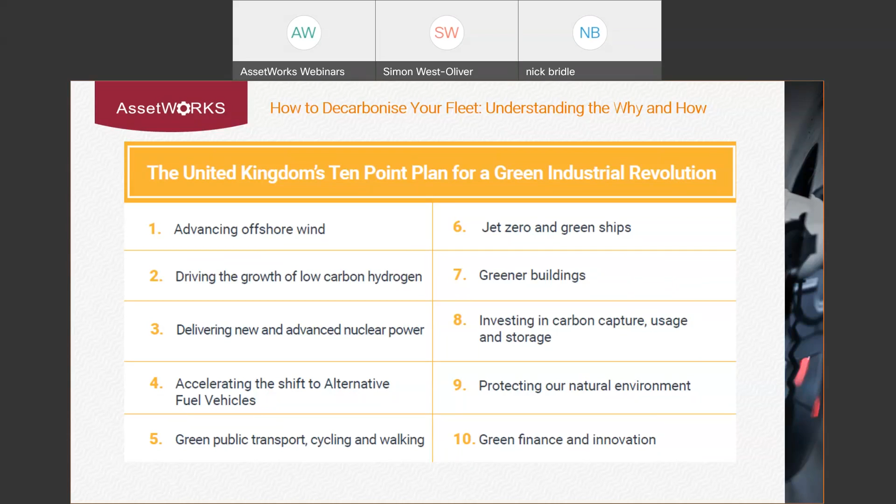The area that we really want to concentrate on is number 4, which is accelerating and shifting to alternative fuel vehicles, and the impact that has on you as a fleet operator going forward. I want to spend a little time looking at this holistically, the impacts that are already happening and the predictive impacts we're starting to see. What started off as a very slow drift is now really gaining some momentum.

Next slide, please, Mariella. So here's a few interesting points, which came out from Telekom Deutschland a while ago. It's a European view, but it's quite interesting. We're expecting to see a peak of cars by '25, and then to start to see a steady decline. Now, this is across the whole of Europe.

What we are actually starting to see is a dramatic increase in the search for vehicles with alternative fueling capabilities, moving away from fossil fuel vehicles, and that is really starting to gain momentum. Partly driven by declining usage post-pandemic, but also really defined by Joe Public, the ordinary operator of the vehicle, starting to get on board with the concept that we have a time limit. But the impact has also started to arrive with the OEMs, because they're realizing that as we move into these different fuel type sources, especially EVs, their after-sales opportunities for spare components are going to start to change, and drop quite dramatically.

We're also starting to see that change in advanced driver assistance systems, this drift towards autonomous driving vehicles. It's the cost of these types of solutions that has inhibited their future development, but that's starting to decrease. It's also the infrastructure starting to change that could support that type of vehicle. And this is really starting to push that change from ownership to usership. So we'll start to see the automotive industry start to embrace different channels to market, and that will have an impact right across how fleets are operated.

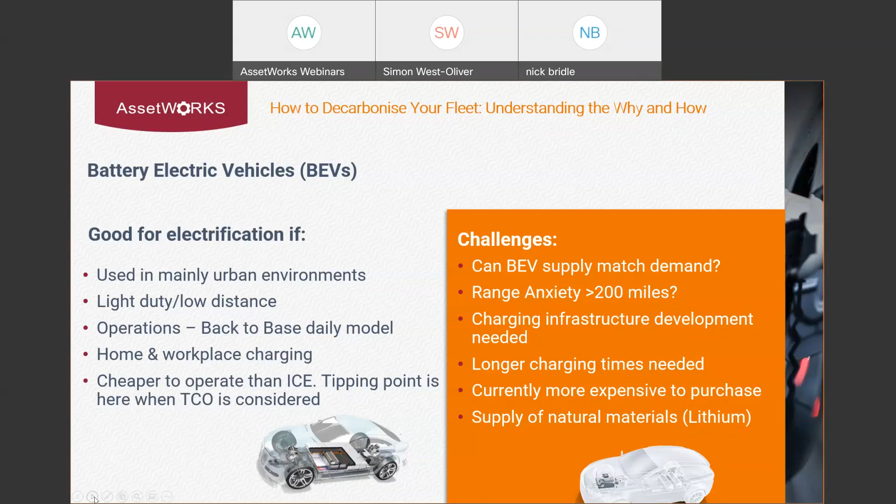So the alternative, fuel cell electric vehicle technology, is starting to appear. It does offer considerably longer range. Battery tech is smaller, more agile, and there is this opportunity for exploiting some of the decarbonisation products around renewable energies, especially things like green hydrogen. It is scalable. We're only just starting to see the appearance of hydrogen cell tech coming down into the LCVs and the car sector, but it will start to arrive, and it will start to arrive with some pace.

For me, I have a biased opinion—I think it's the fuel of the future. But certainly, I think for our commercial vehicle operators, it is the way to look at how you decarbonise some of that HGV operational requirement.

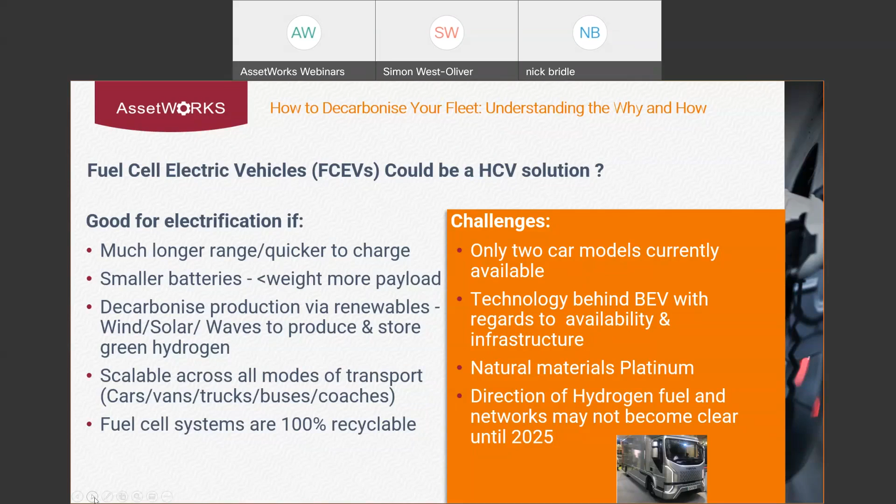That's the end of my presentation. I'll hand over to my colleague Nick. He's going to talk a little bit about how we help organisations decarbonise.

Thank you, Simon, for that informative update. I'm just going to now take you through our CAM capital asset management product and how we can help fleet and asset managers forecast out those decarbonisation plans, etc.

So before investing in EVs, first off, we need to prepare our fleet data or asset data. How clean is that data? Does it currently exist in spreadsheets or silos? And am I able to provide a report and a number of scenarios with recommendations to the board? I'll come on to some of that in a minute.

Can we all answer the following questions with regard to our fleet data? We're looking for a strategic capital forecast out for the next 5 to 10 years based on scenarios. Can I create an OPEX forecast—not only the capital I need to purchase or lease the vehicles, but the OPEX I need to maintain those vehicles by year? We've mentioned clean air zones, and some national fleet operators, or where you travel extensively, need to look at when you purchase new vehicles, maybe not put them into certain sites. You may need to move some of those new cleaner vehicles into these clean air zones so you're not paying the fines, and move some of the not so clean vehicles out elsewhere. It's a consideration. And what is the optimal vehicle replacement time per vehicle by category?

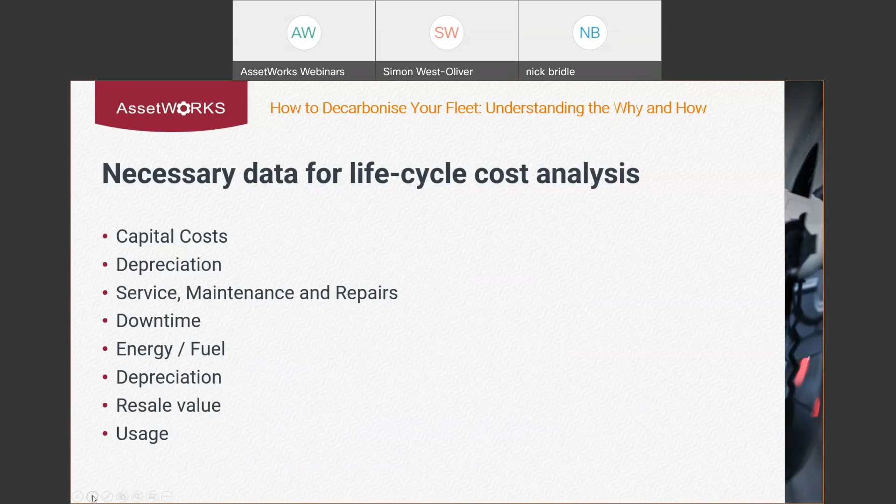So what is CAM? CAM is our capital asset management system, and we're managing full life cycles from plan to disposal. So we can procure vehicles through CAM, we can dispose of vehicles, we can do the analytics, and we can do the planning and the budgeting. And in the center we have a data mart where we will load your fleet details, and we can do that life cycle modeling through that fully integrated product with our maintenance and our fuel systems.

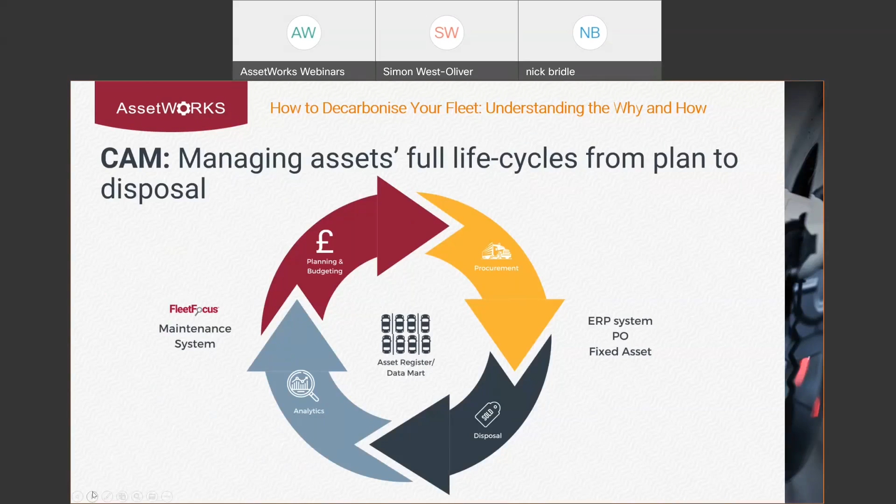So the data mart in CAM from our FleetFocus product, we can bring in maintenance, labour, parts and commercial costs. We can bring in downtime costs, our energy, our uses in our capital, and we can run that information into the CAM system on a regular basis to be able to do the analysis.

So what does CAM do? It manages all types of assets, not just fleet. It can manage plant, it can manage the charging infrastructure now. So if you have a project to replace a certain amount of vehicle types in an operational location, you can also use CAM to procure the charging posts and some of that project information, any type of equipment. So it's not just fleet assets - it's the associated plant, the chargers, laptops, anything else you can procure via CAM.

So Simon mentioned options for decarbonisation. This is a bit of a busy slide, but on the left-hand side, we mentioned range up to around 200 miles. So for your daily operations, a lot of the plant and the small delivery vehicles, some of the RCVs, the refuse collection vehicles the local authority uses, they're all at low mileage on a daily basis. So those options up to 2022 now are viable for the move from ICE to battery electric.

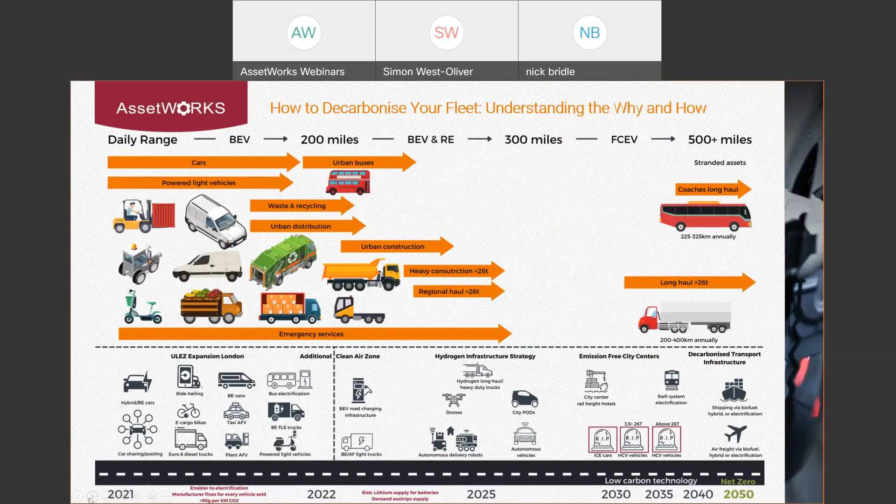So the life cycle model we're going to get into now. And the life cycle model is based on a category. And a category is a type of vehicle, an operational vehicle - it's not a spec, it's not a Ford, a Vauxhall, or a Mercedes. It's more of a light commercial vehicle for deliveries, or it's a heavy commercial vehicle or a 7.5 ton truck. And we look at its operational life cycle to determine when's the best to optimize that.

Now, having said that, at year 5, some of our customers will look at when the operating costs exceed the depreciation, and that's another consideration on that life cycle. So we can run life cycles by categories, and we can look at the data, the depreciation and maintenance, the downtime and the energy, and we can run a MECE model to determine when is the lowest year and what should that life cycle be.

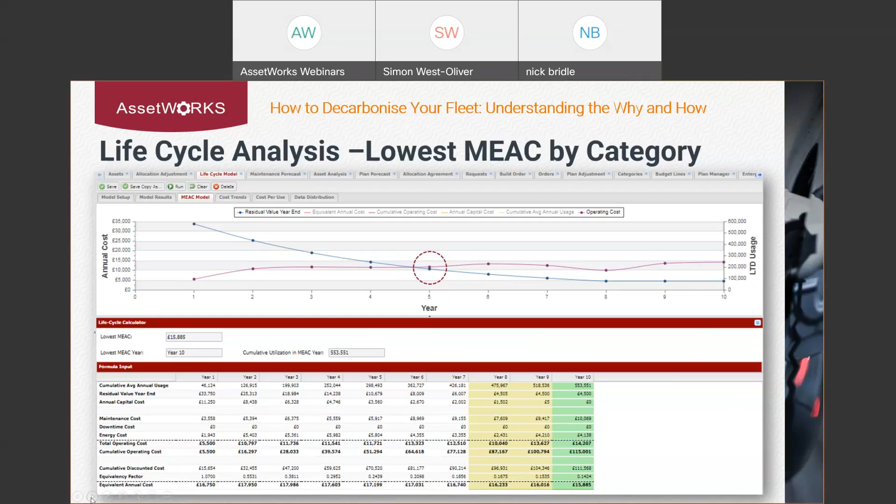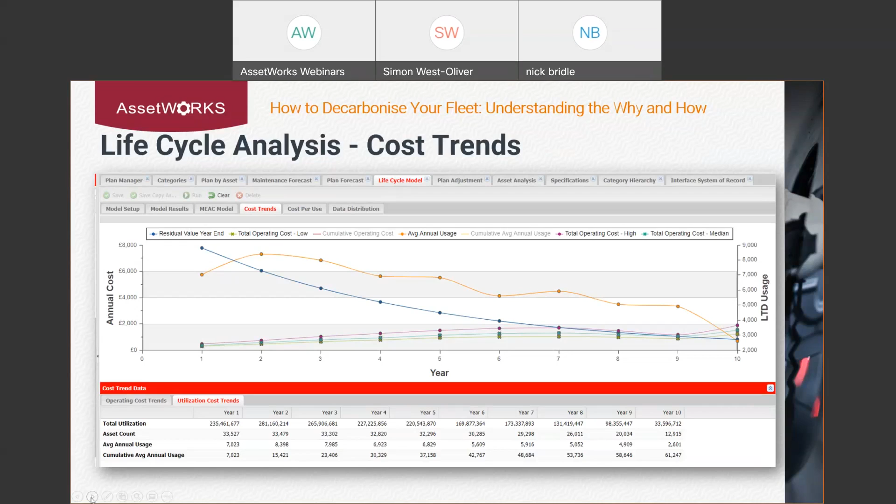Okay, now we get into the operational view. If you remember on the MEAC model, we said year 10 was the lowest operating cost from a finance view. Now I can look at my pence per mile cost by category.

So we can look at the MEAC model from a finance perspective. We can also look at our pence per mile costs, and we can determine that year 10 on a MEAC basis may not be the most efficient.

Maybe year 7, if I look by pence per mile, on those categories. So I can run those scenarios and we can have an informed debate based on data and technology in the system.

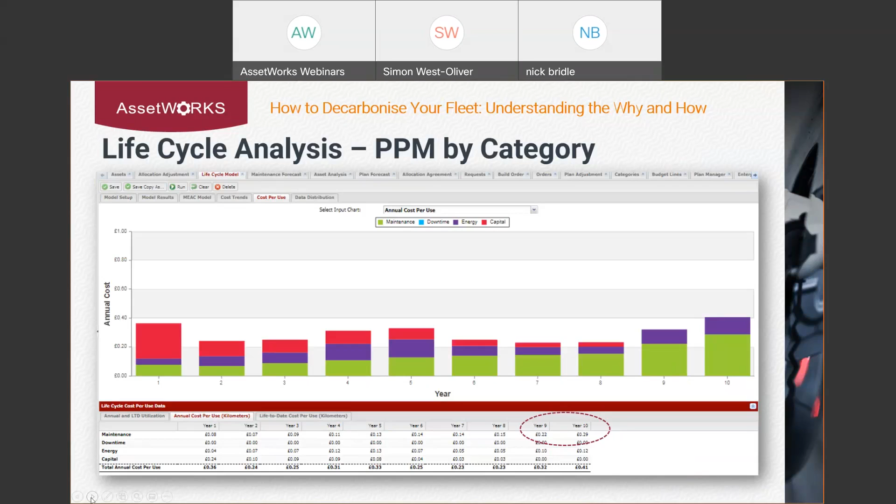From a maintenance perspective, we looked at the capital costs. We have a maintenance forecast and a rate card, and what this rate card does is pick up the costs of this category.

These are car-derived vans in this example, and we can model out the labour, either the SMR costs or the non-fair wear and tear costs, with the labour hours for every vehicle in that category by year — years 1, 2, 3 — and we can identify what the costs are in each of those years.

We can model that out into a workshop budget or a fleet-related budget that supports the capital. So the capital and the depreciation we're going to look at, and now we're looking at the rate card.

We're looking at what the impact is of those operational maintenance costs on this type of category throughout the years. So we're looking at both CapEx and OpEx as we start to forecast out the future.

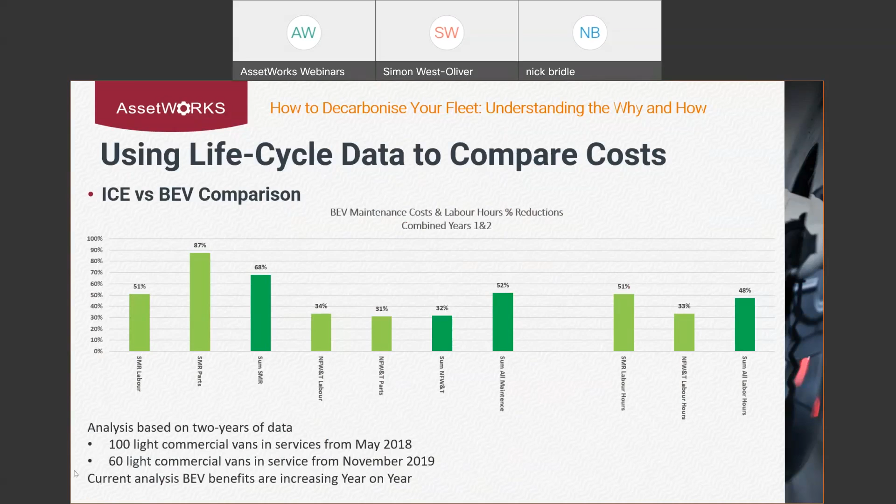Okay, so what does that mean for our life cycle? So I mentioned we can forecast out for 10 years. Based on the fact that we could reduce our light commercial vehicles, we may be able to replace some of those light commercial vehicles now.

Nearly all the customers I've dealt with have a tail. So they have overdue assets — they're capital starved, they have overdue assets — and as I explained earlier, the impact of overdue assets is increased OpEx or maintenance costs.

So if you don't want to replace the vehicles, or you haven't got the capital to replace them, you need to increase your budgets from an OpEx point of view, because you can expect more maintenance. In this scenario, as I showed you earlier, we may say Euro 6 diesels are clean, and we may need to replace some of our Euro 6 diesels later, moving them up to 2025 to 2030.

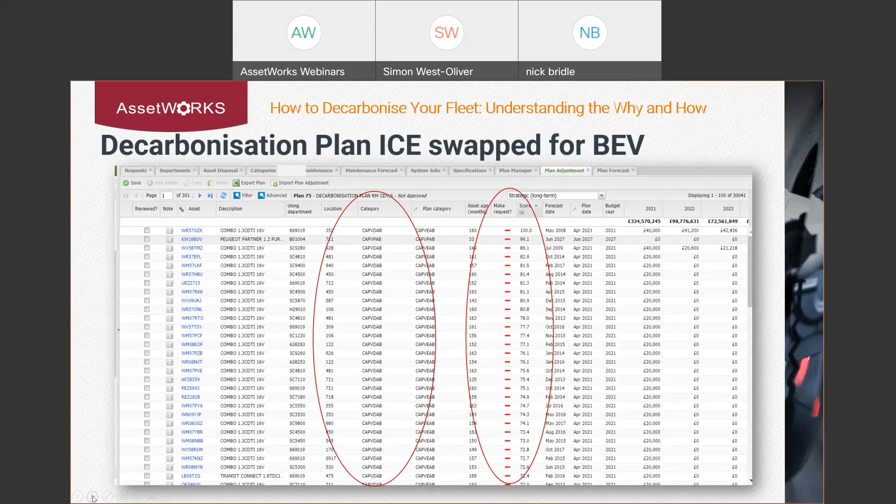If you've only got funding for 50, you take from 50 to 100, and you can push those through a replacement plan. All of this data is being built by asset into that forecast, and then we can replace our ICE vehicles with our battery electric vehicles, and we can look at the impact on the cost and forecast that out.

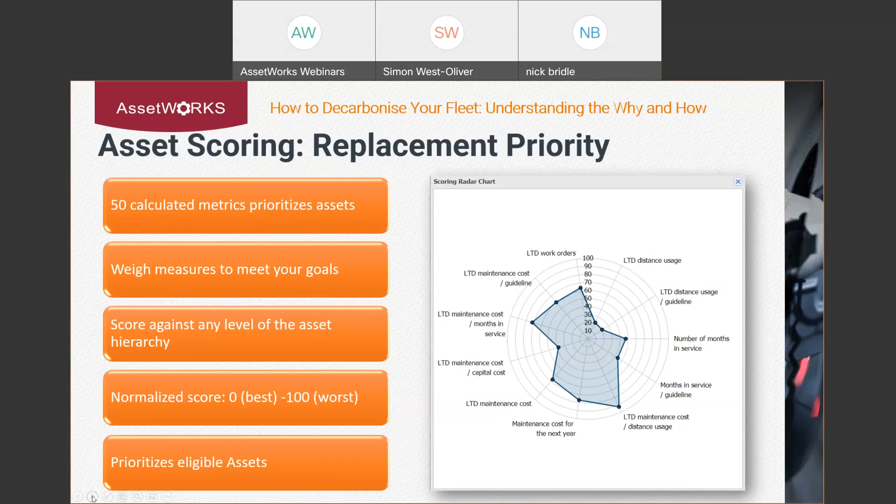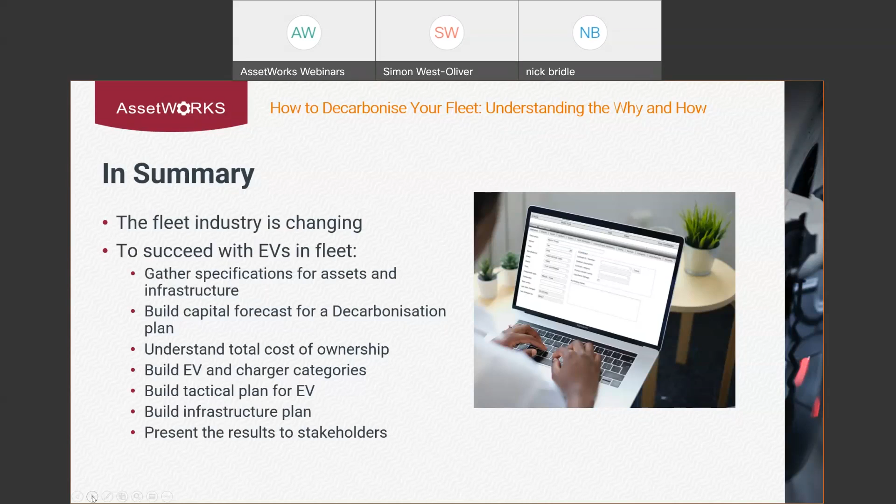We can build EV charger categories if you want to put your charging infrastructure into that project. And we can build a number of tactical plans for EVs, present those to the board and gain authority for CapEx and OpEx. That basically builds us an infrastructure plan. And the main thing is, now we've got some results that we can present to the stakeholders for consideration.

Okay, so AssetWorks, CAM and FuelFocus. As I said, CAM is a powerful planning tool but requires accurate inputs. Charging costs are unique from organisation to organisation. Only our FuelFocus EV product allows actual data to be uploaded in real time and supplemented by asset class, department or individual vehicle. So I hope that's been informative for you.